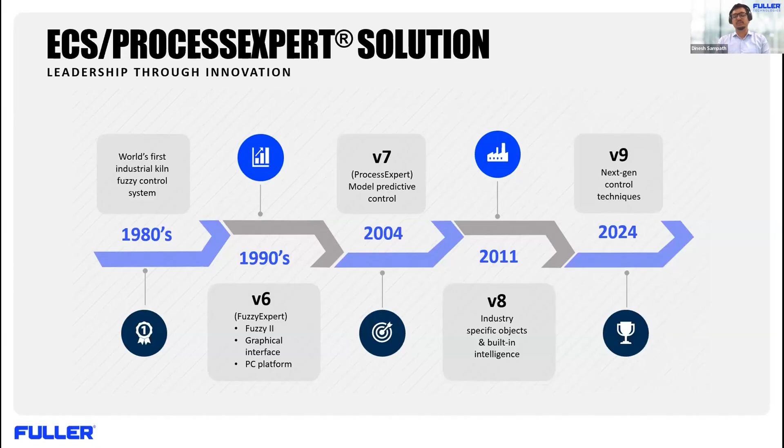And one big step change that we did was in 2024 with version 9.1, where we introduced the self-adaptive control technology that is now seen as an industry leader in advanced process control technologies. So now on to the challenges in APC, advanced process control, specific to cement manufacturing. Not all cement manufacturers really get the full benefit of APC, and we need to understand why.

Instrumentation and data reliability: any good, even the best advanced process control with all the technology it has, really needs the base foundation of the right instrumentation and reliable data to feed in. And then process variability is something inevitable as we grow and mature in the industry, because we have different KPIs based on different regions which we need to satisfy. That makes the process more non-linear. So the advanced process controller has to be more robust to take care of the process variability and non-linearity that comes along with the process.

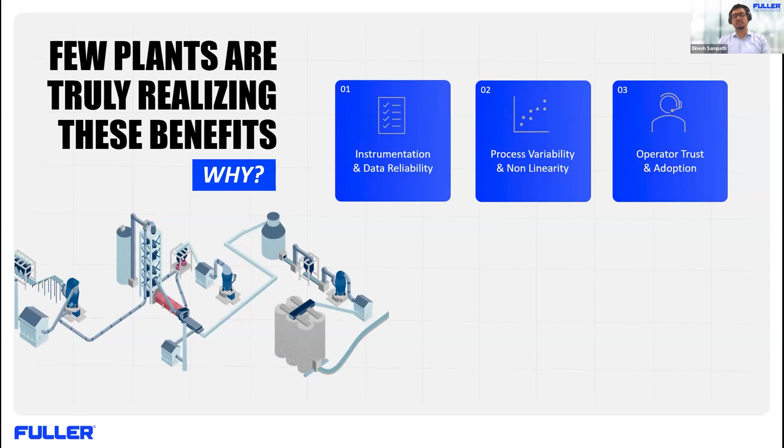And then the most key thing is adoption by the operator. If he thinks it's a black box, then he's going to override and do manual control. So transparency and trust make the operator utilize the advanced process control in a longer, sustainable way. And the other key aspect is ownership. The lack of ownership is one unfortunate situation.

The success of advanced process control is based on mutual engagement, where the supplier and the cement manufacturers come together and don't see advanced process control as a one-time project where you deliver the benefits, maybe once you commission within 3 to 6 months, and everybody is happy. Instead we see it as a long-term system where we set the relevant KPIs to periodically measure, and that creates accountability for the end user. That level of commitment and engagement is really required for long-term success.

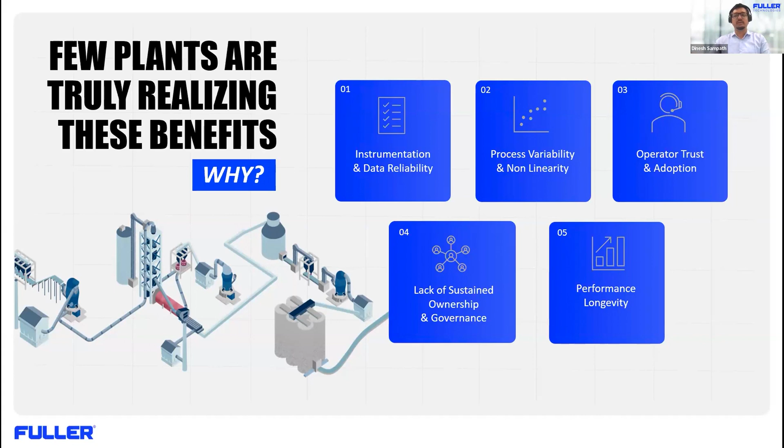And finally, performance longevity. Any kind of best APC will still have degradation for various reasons. It could be the process, it could be the controller itself, but we need to address this at the right time so we have sustainable benefits over a longer duration. Overcoming all these challenges makes the success of real advanced process control technology. And we from Fuller in ECS ProcessExpert try to focus on these challenges and provide solutions accordingly. That is how we evolve our product and keep it relevant to the market.

And that brings us to the self-adaptive controller. Back in 2024, we shared how we were introducing this new technology. Now it is more about what it has delivered to the market with the global installations we had. The self-adaptive controller, as it says, can adjust to changing process dynamics based on rate predictive control technology. So it can self-learn. It can predict the rate of change of the variable, and by predicting that, it can act proactively. Since we are acting proactively, it brings stability in no time, avoiding overshooting of the measurements or variables.

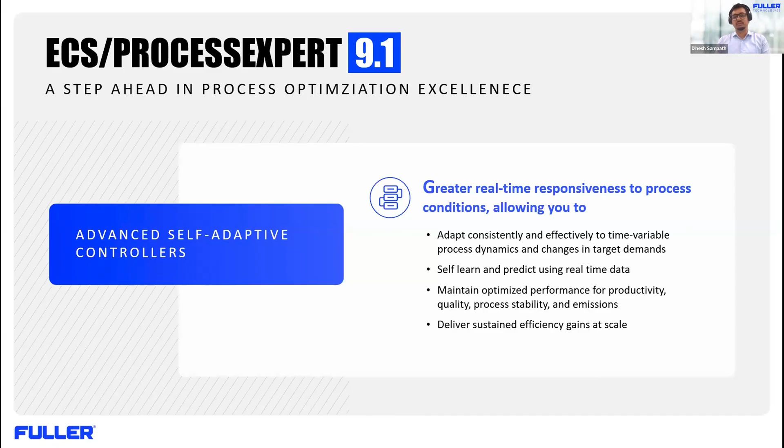This increase in stability and adaptive nature based on rate prediction makes it outperform fixed model control technologies. When I say fixed model control technology, I mean MPCs and other older technologies like fuzzy. This is a model-less controller, not a static model-based controller, so it delivers sustainable benefits. What makes it stand out as an outperforming controller is, as I said, that it increases stability by the nature of its design to adjust to the process dynamics.

And the most important aspect is being a single whole controller. One single controller can handle the whole process, which means we don't have to have multiple controllers tuned for multiple scenarios. We know any operation has different scenarios, so we cannot wait for each scenario to happen to tune a controller for normal conditions, upset conditions and different conditions. This is more intelligent and smart. One controller can be smart enough to be aggressive, or sluggish or steady state, whatever is required for the process. So we don't have to spend a lot of time tuning for different conditions, and it delivers stable operations.

So this leads to high utilization. High utilization, if you ask me, is the foundation for any justification of the KPIs. We talk a lot about the benefits and the improvements, but it will be justified only if we have very high utilization. Even for the enhancements that I'm going to talk about, adding soft sensors to the layer and trying to increase the optimization, the foundation is high utilization.

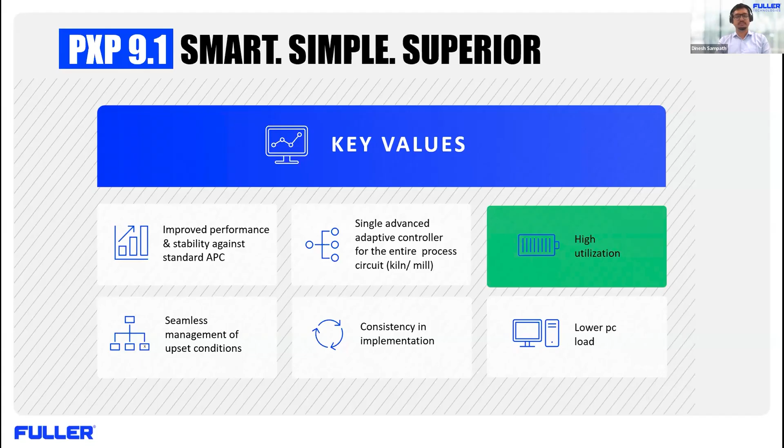So what we see in a standard APC and what this self-adaptive controller has enhanced, as you could see on the KPIs, from 2 to 5% of benefits in terms of energy consumption and productivity, we could move to 4 to 7% of benefits, and relative improvements in terms of CO2 and alternate fuel usage. Of course, these numbers will vary from plant to plant, but we must remember that what we are talking about is the trend. The trend is proven that it can outperform a standard APC with a model-based control technology.

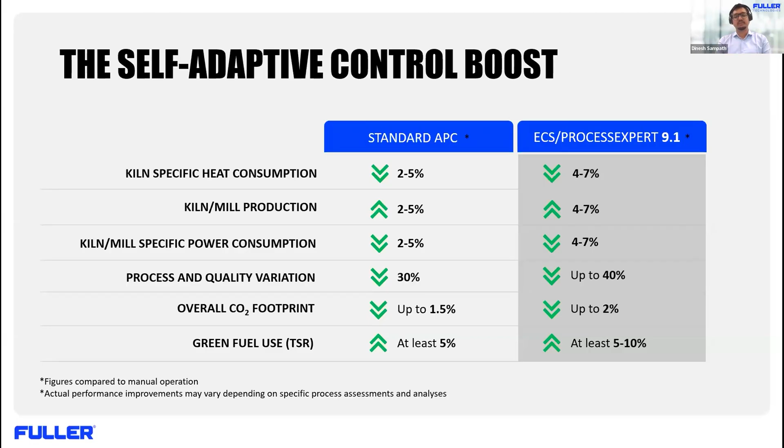And now coming to the benchmarking here. So the case stories. We had real world case stories. In fact, we had more feedback and case stories from customers. Considering the time, I cannot present all of it. So we just picked 2 of these, which we already published in our forum on the web page. One of them is GCC Mexico.

Here it is an interesting story where the customer had to replace a non-PXP advanced process control with PXP, seeing the technology as a very positive thing, and then they could see the benefit, as you could see in the trend. In terms of capacity, there's an improvement of about 4.2%, and also on the energy consumption, the power consumption and heat consumption as well. And the important thing is we could see there is an improvement in terms of alternate fuel usage.

That is one of the key things which we see in all of the plants that we implement, being a focus on green fuel usage, and also improvement in the product quality. Here, it being a kiln, it's a free lime standard deviation for the clinker. So these case stories are already available on our web page.

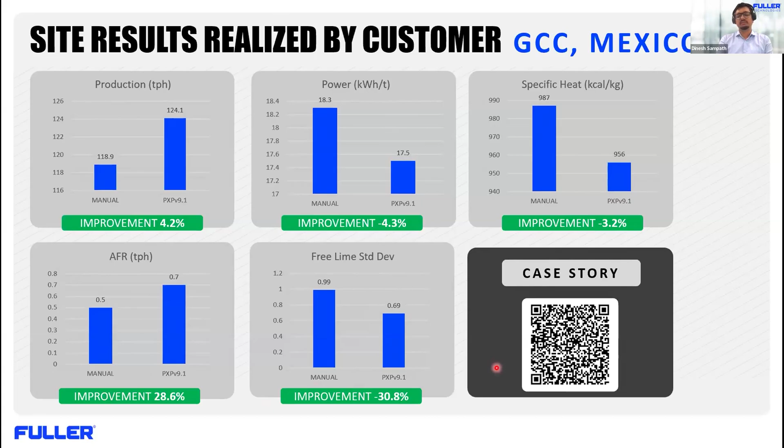Another interesting story is a customer which had much interest, being an early adopter. I'm talking back in 2024, where they were using our PXP 8.5, the version before 9.1, for say 6 months to 1 year. But seeing the advancement of the technology, they wanted to upgrade to 9.1. So there you could see from manual there was an improvement even with 8.5, with the fixed model based standard APC approach. We had a benefit of about 3 to 4%,

and then upgrading it to 9.1 with the self adaptive control technology, there was another 3 to 4%, summing it up to around 7 to 8% of total benefit, and the customer was very happy, as you could see from their acknowledgement that we received here. So this shows a clear difference from manual to a standard APC, and then from standard to the self adaptive control technology.

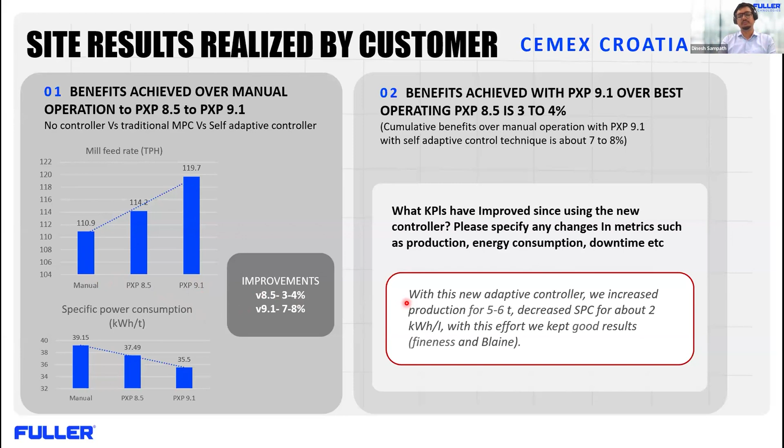So now we talked about a very strong foundation, a proven technology, and a controller that is robust, which has addressed the majority of the problems and challenges that I've been explaining. So now we have to turn to the other constraints, that is having the critical data at the right time to enhance optimization. And for this reason, we made a strategic partnership with Imubit.

So what are we delivering here? We are integrating the PXP 9.1 with the AI-based soft sensors from Imubit. We call it a best combination because FLSmidth ECS ProcessExpert comes with deep process knowledge and control knowledge over decades. And now we are adding Imubit, a robust platform with highly reliable and highly accurate soft sensors.

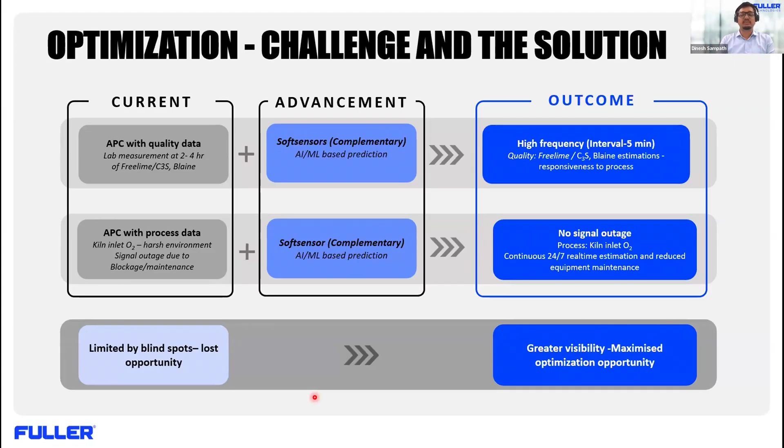So from the limitation caused by the blind spots of missing critical data at the right time, we move towards greater visibility where we have chances to maximize the opportunity. We reduce the gap and we maximize the opportunity space. So this is the logical approach, which makes a lot of sense in terms of enhancing the optimization with what we have now.

And now we have to talk about the real experience that we had on site, where we did a trial in GCPV Monjos in Spain with a free lime soft sensor integrated closed loop into PXP. And what we achieved is an improvement in product quality in terms of reducing off-spec clinker. That is a lot of improvement, and also an improvement in energy efficiency.

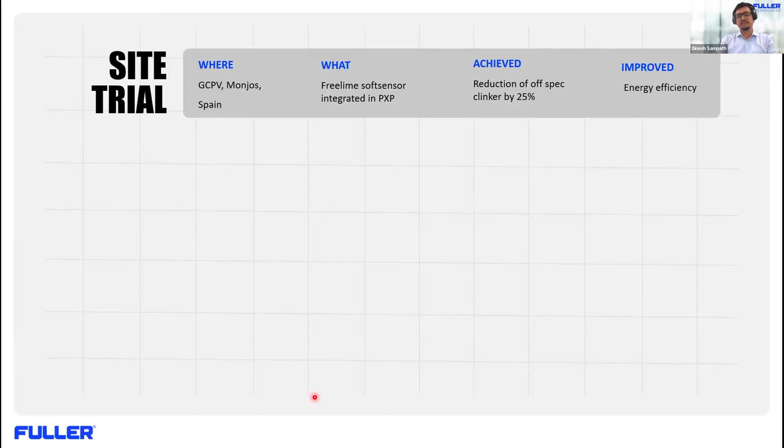So here is a trend to give you an overview of the real-time experience on site. The brown line you see is the predicted free lime, at every 5-minute interval. Then we have the lab free lime, at a 2-hour interval. And then we have the torque target, which is now adapted every 15 minutes. Previously, without a prediction of free lime, the primary parameter to measure the kiln status is the torque of the kiln, and its target used to be adapted every 2 hours based on the lab data.

Now we are able to adapt based on 15 minutes, that is 8 times at least within the 2 hours, based on the free-lime prediction. So if you see the accuracy and the directionality of the free-lime, we could already sense well in advance and get a deeper insight into the product quality that you're producing already in the kiln.

So by knowing that the product quality is changing continuously, we are also changing the target of the primary measurement. And because of that, the stability has increased. And because of the increase in the stability, we are able to improve the product quality and also reduce the energy consumption, improve the energy efficiency of the plant. So in that way, it was a very positive outcome, both in terms of the soft sensor credibility and the reliability, and also in terms of the closed looping and the overall benefit which we aimed at in the first place in this combination of the PXP and the soft sensors.

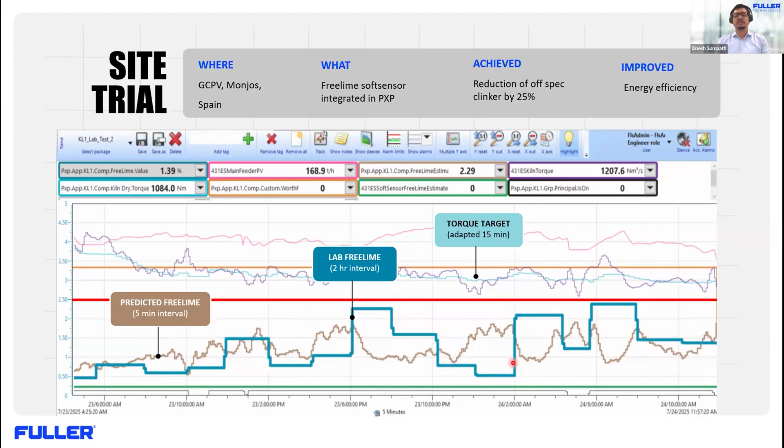And then we move on to the value and the performance, which is very important in terms of the different layers that we can imagine in the optimization world. First thing, the basic thing, we have a manual combination PID. It is very limited, highly variable, and has more scope to improve. And then it comes to standard APC with the model-based control technologies and so on, where we could expect around 2 to 4% of benefits depending on the site. And then we have our strong foundation, that is the ProcessExpert 9.1 with the self-adaptive controller, which can add another 2 to 3% to make it 4 to 7% of improved benefit compared to manual.

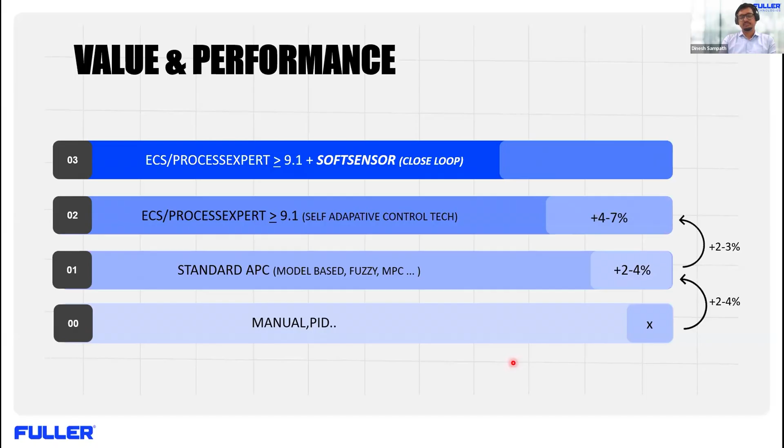And now, the combination of this strong optimization engine plus the soft sensor can add another 1 to 2% to make it a 5 to 9% overall improvement. So these are the steps. We have to see this in steps, how we take it from a standard APC to the next level of superior control technology, and then enhance the performance by adding a soft sensor to create better visibility and deeper insights through the AI-based predictions, so that we are trying to fill the gaps that are in existence. So that is the overall narrative that I want to give here, and that brings me to the end of this slide.

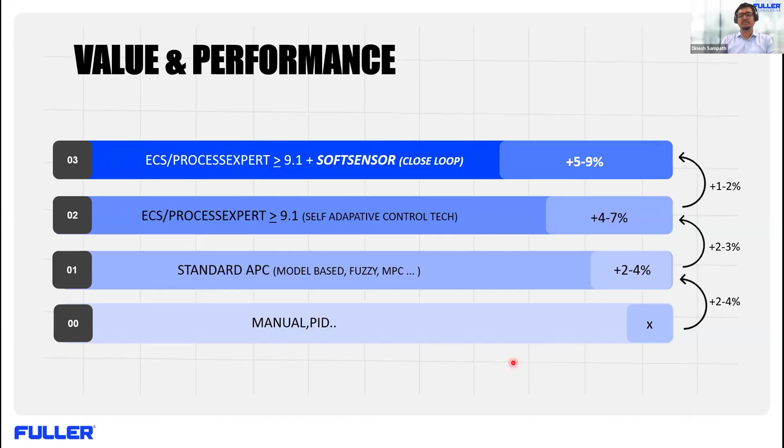Thank you very much, Dinesh. A really intriguing presentation. There are a few questions that people are asking.

One that I'd just like to start with is you opened up with a slide, and you said why are these benefits not being fully realized from the different software, and two of the reasons seemed to be kind of human. It was operator trust and adoption, and it was lack of sustained ownership and governance. And this was something that we talked a bit about at Cemtech in Riyadh. There seems to be a lot of importance on ownership of these systems once they're installed in the plant.

For them to be truly effective, the human element is actually still very important. They're not just plug and play. You have to have people buying into them and knowing how to operate them. How do you approach that challenge? So this is a very crucial thing, because for the success of the APC, the trust and the buy-in from the humans on site is very important. So the approach here should be that the APC should bring a lot of transparency.